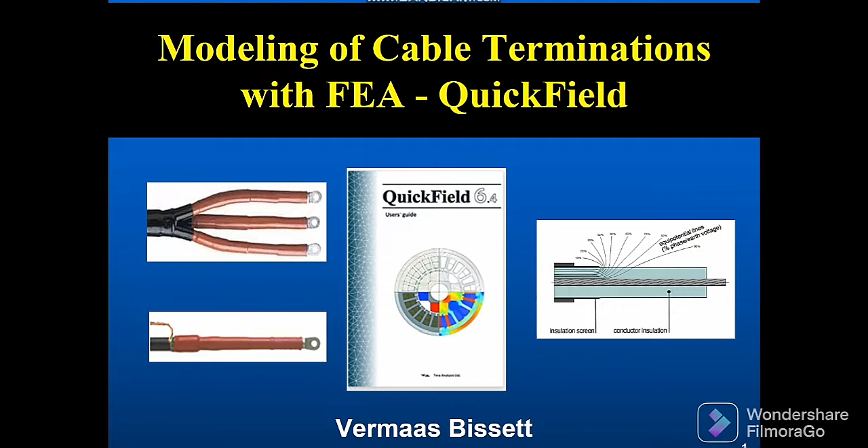The importance and reasons for termination modeling: there are many reasons why this is important. One could summarize as follows. It is a critical component of power systems at all voltage levels. There is currently evidence in the industry of high failure rates, especially at the medium voltage level. It is a specialized and complicated domain. Many defects due to poor workmanship can be simulated by making use of finite element analysis. It will increase our understanding of the behavior and root cause of failures.

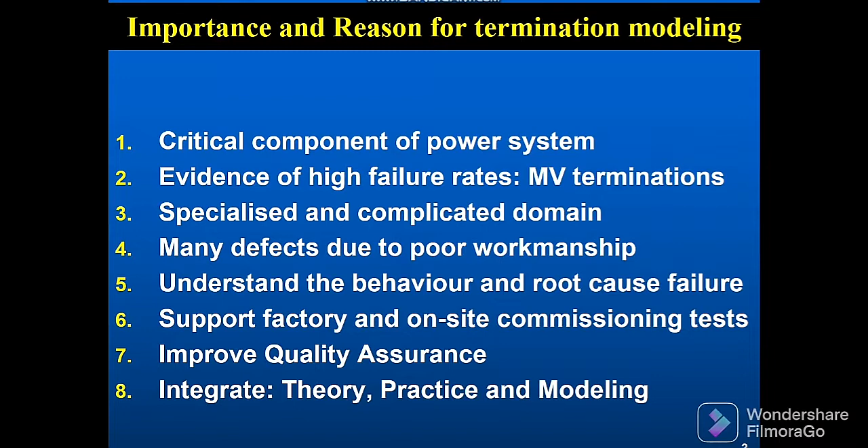It will support factory and on-site commissioning tests. There are many international and national standards that prescribe certain voltage levels for on-site commissioning. By making use of suitable models, one could have a better understanding of the specified voltages required. It will also improve quality assurance, especially if modeling can be incorporated into the training curriculum for cable terminations. And most importantly, it will provide an integrated approach whereby the theory, the practice and the modeling of electrical engineering are combined to add additional value.

Why finite element analysis? The picture below represents the partial discharge models currently available within the industry. On the far left is the capacitor model, or the traditional ABC model, most common for simulating partial discharge within materials. There are also induced charge models and plasma models. But a very attractive method to simulate cable terminations is finite element analysis, especially with its electrostatic capabilities.

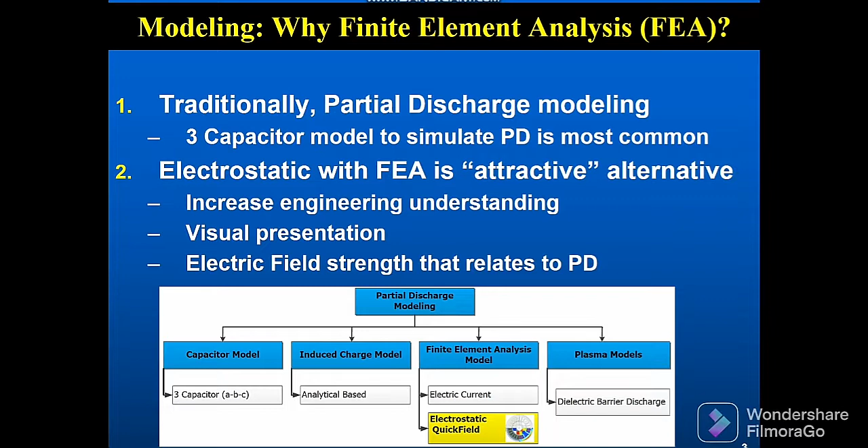Why is it so attractive? It can increase our engineering understanding of this domain. It is excellent for visualizing the model and the component under evaluation, and one can relate the electric field strength to the partial discharge.

Overview of the presentation and demonstration: in this video I will explain and demonstrate with QuickField the critical stress area at the triple point. I will further present three QuickField models. The first will be the termination defect most commonly found in the industry, called the ring cut at the triple point, done with an axisymmetric model.

We will also look at a defect-free termination with all the subcomponents, and then a third model representing the cable as prepared but prior to adding any of the termination components, done as a 3D extrusion model. Lastly, there will be a comparison between the calculated values and the simulated values of electric field strength at the triple point.

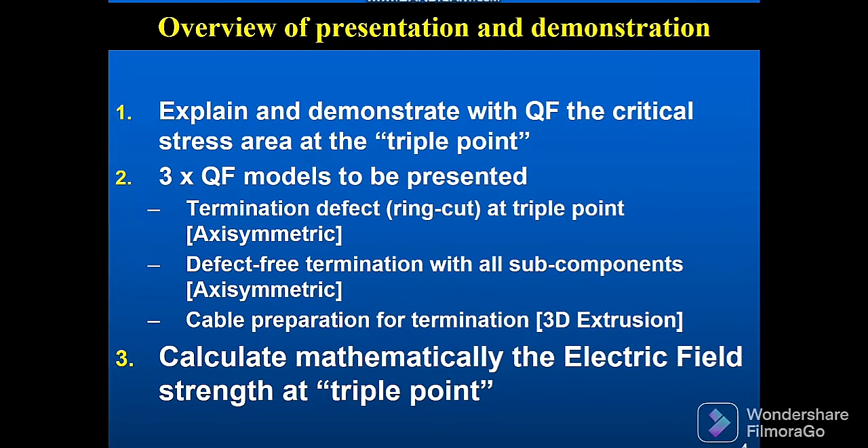If one creates a defect-free model for a cable termination, it is important to follow certain criteria. A precise dimension should be followed at all times when referring to the instruction manual, and the material detail for all subcomponents must be known. It is also important to have a good understanding of all the subcomponents, like the stress relief mastic, stress control tube, and the anti-track tube.

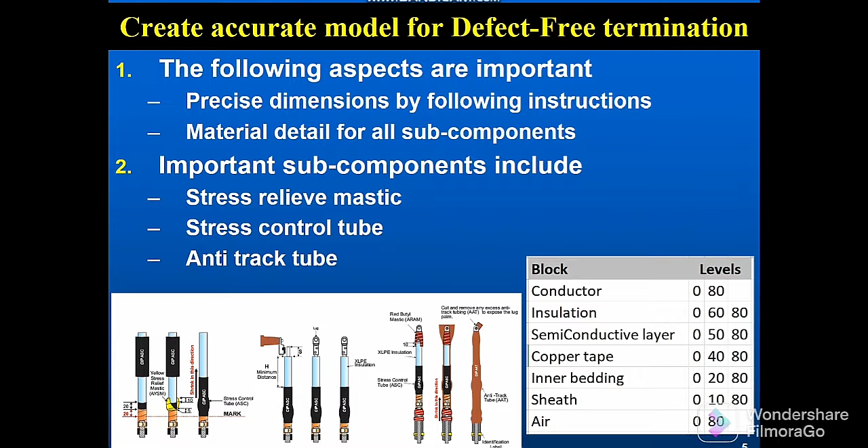Furthermore, when one builds the 3D model, there should be a clear understanding of all the applicable dimensions. When building the ring cut defect and the defect-free termination, one will look at the constructed model within the QuickField program, and I will also refer back to this sketch to make it clear where all the subcomponents of the cable termination are located.

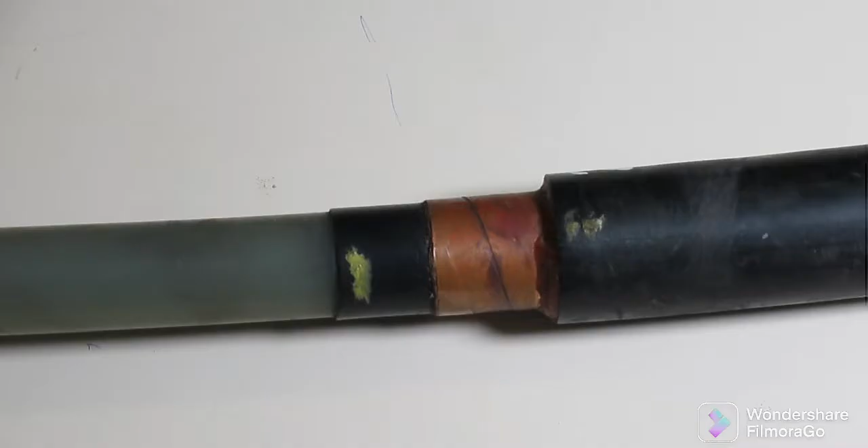In this video, with all the modeling and simulation, a single core XLPE cable will be used. This is the cable that was used, with the given dimensions: the insulation or XLPE, the semiconductive layer, the copper tape, and the sheath. The triple point will be discussed, which is basically the point where the semiconductive layer, the XLPE insulation, and the air come together.

So the triple point is the circumferential area around the cable considered to be the critical point. In order to prepare the cable for the termination, good workmanship is required in this area, as well as the correct tools, and it is important to follow the instruction manual in terms of dimensions.

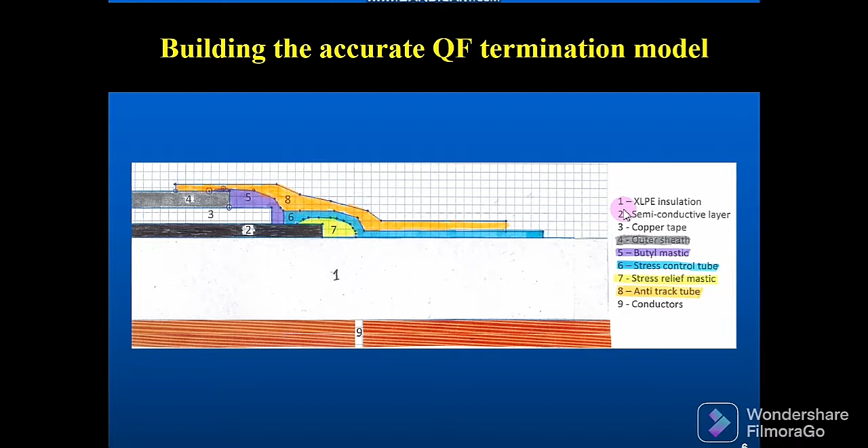The following section of the video will focus on modeling a defect-free cable termination as far as possible. We will construct an 11 kV cable termination using an XLPE cable, using the detail presented earlier and the various components that form the cable termination. This sketch can be used as a reference, indicating the various parts of the cable and the termination.

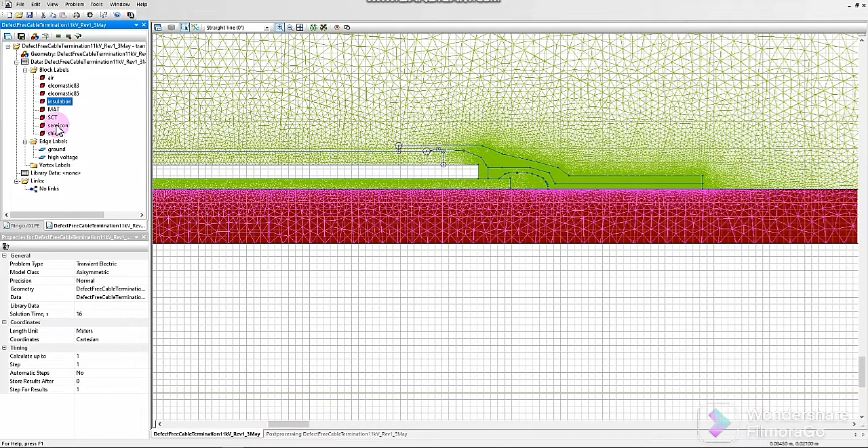For completeness sake, we will quickly indicate where the cable and the cable termination components are. First of all, we will start off with the insulation, then the semiconductive part, as well as the ground part or the copper tape that is part of the cable, as well as the outer sheath or shield.

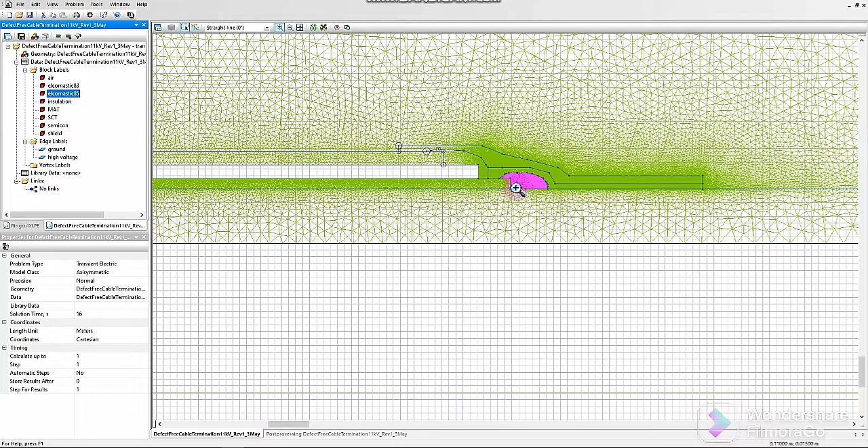Then inside the cable termination, the components that have been used is various mastics. The first one is the one that you will find at the triple point where the semiconductive part, the XLPE insulation and the air comes around. So this mastic is very important.

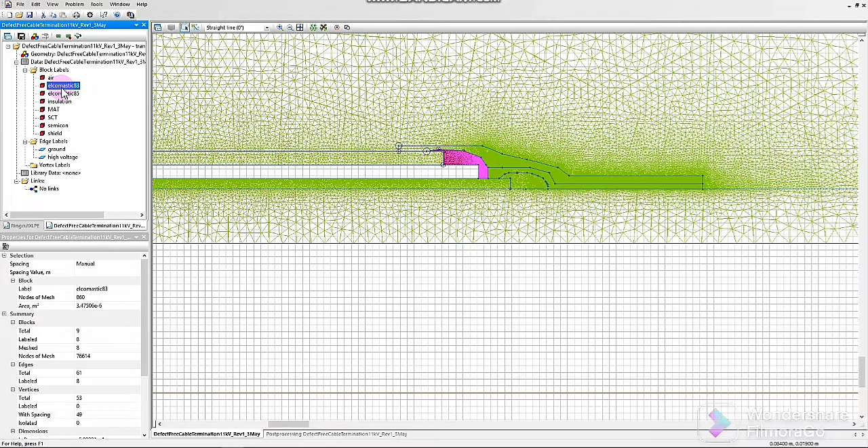Secondly, the stress control tube. Then there is another piece of mastic tape that is applied, and then at the end you will have anti-tracking tube across the entire termination.

This model has been built already and the mesh has been created. The ground voltage is clearly indicated in this area, which is the copper tape.

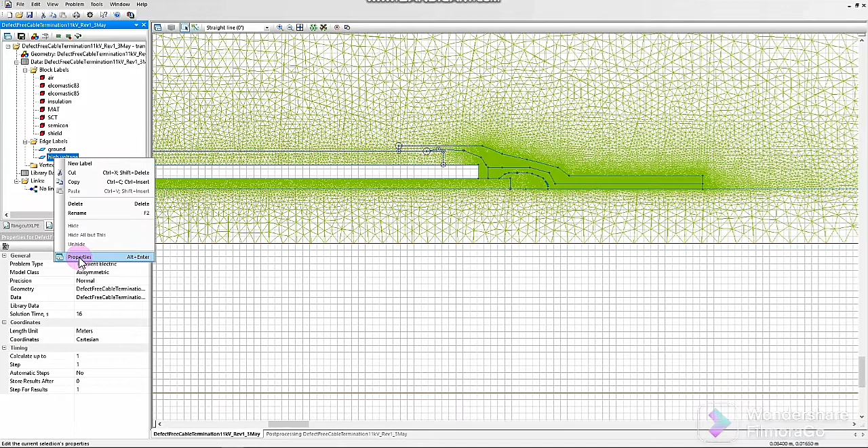The nice thing about modeling the termination is selecting the various voltage levels. So the phase to ground voltage for this termination will be 6,350 volts. So this will be our first simulation, just to see if the model is working.

The important factor to measure is the electric field strength. As you know, air breaks down at around 3 kV per millimeter. So as soon as you reach those levels, it will become critical for the performance of a cable termination.

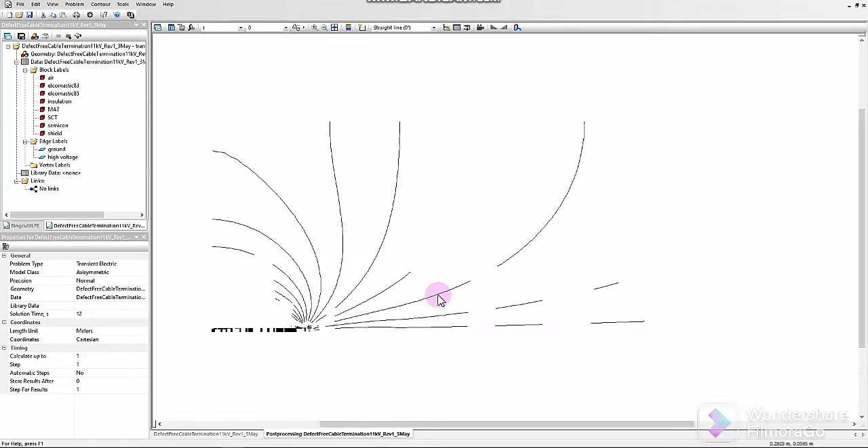One can now zoom in and select the field strength, which will be our primary indicator to monitor during the simulation.

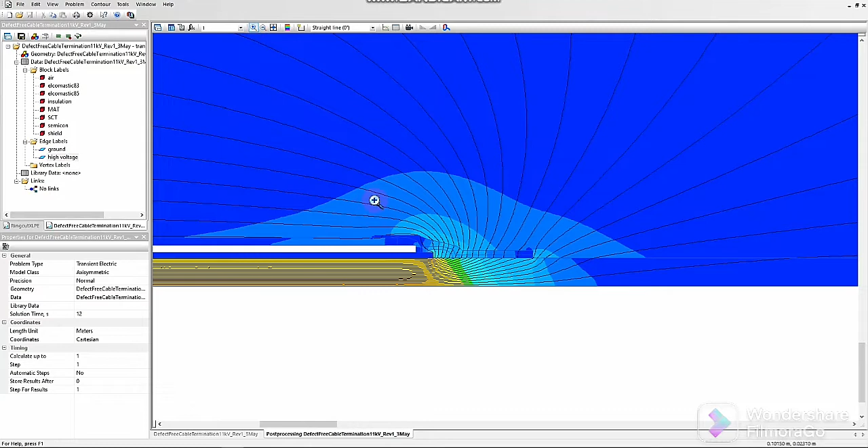If I zoom into the critical area, which is the triple point, the field strength is less than 3. Currently it's standing at 2.53 kV per millimeter, which indicates that the workmanship and the way the termination has been assembled is good. One can now continue to increase the voltage.

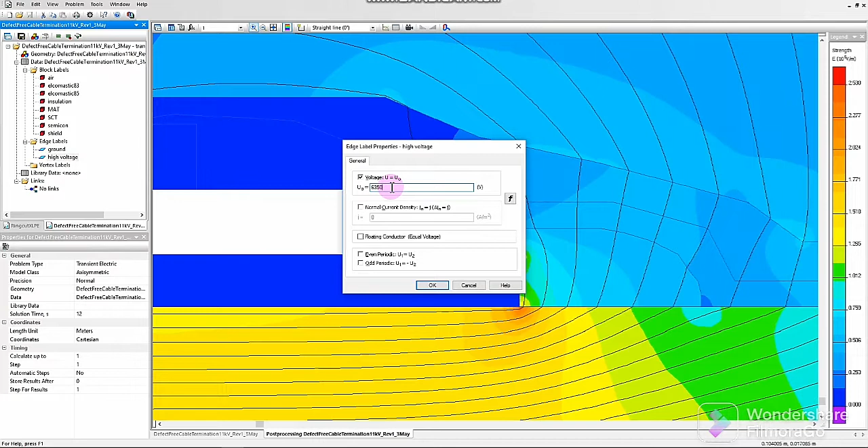The next one will be at 12.7 kV. And this is also the typical values that the test engineer will use when he is commissioning the cable termination.

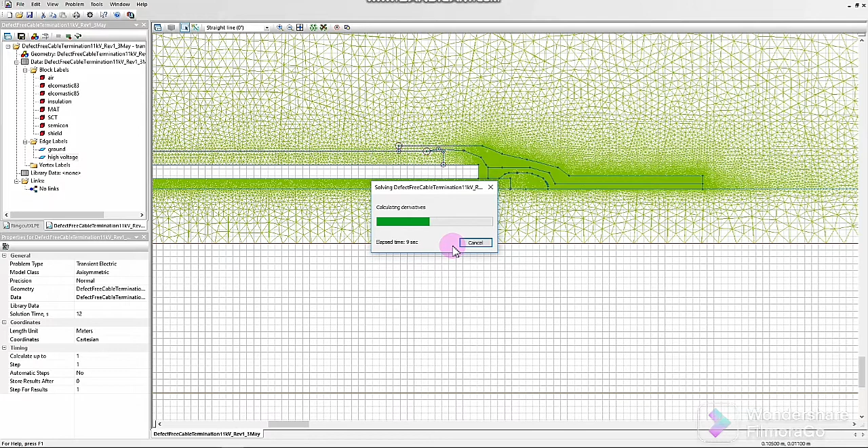Once again, there is a correlation between the applied voltage and electric field strength, but it is important for the density around that area and how that will change with the increase in voltage. Once again, we select the electric field strength. We apply the legend and we zoom into the critical area.

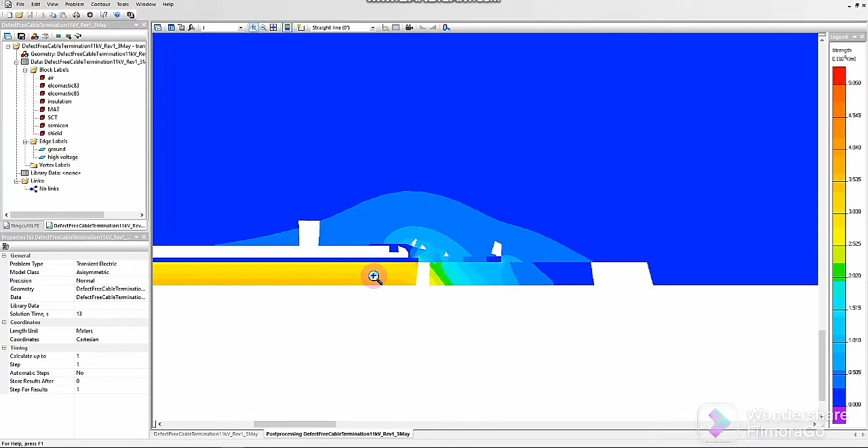So already at twice the rated voltage, one could see that there is an increase in the electric field strength above 5, although it is restricted to a very small area.

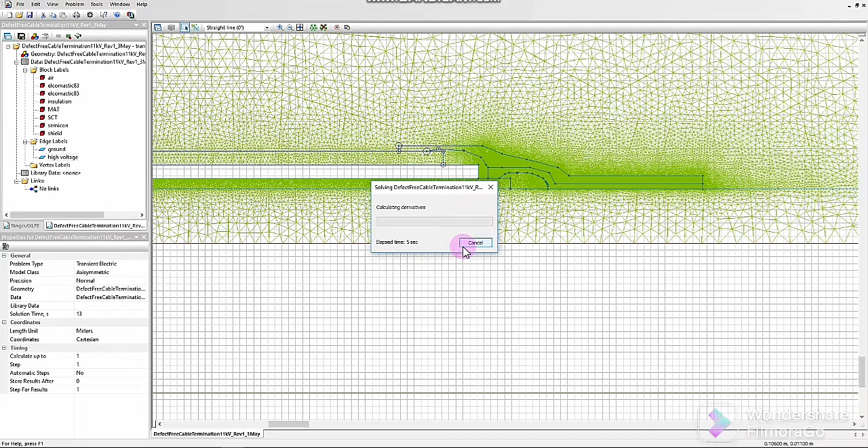The third test point will be at 19 kV. Typically, if one considers international standards, depending on the country and the type of standard, the test voltage can go up to 4 or even 6 times the rated voltage.

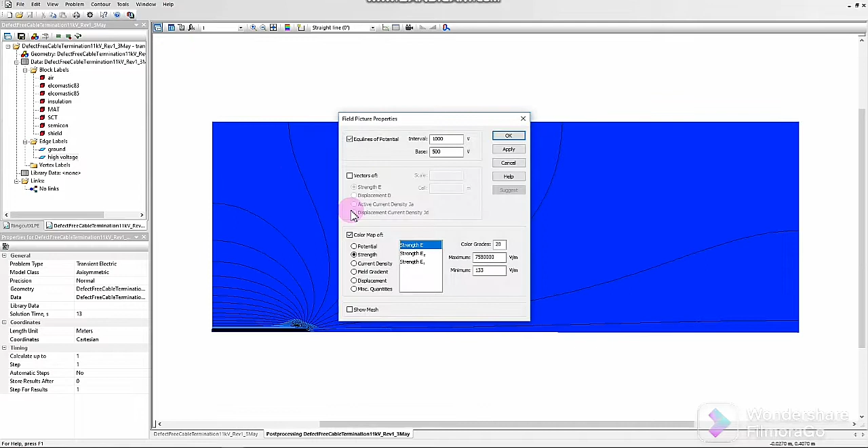So let us look at the field distribution at 3 times the rated voltage. One could see once again it is in the critical area. It is more than 7 kV per millimeter, but it is restricted to a very small area.

So the benefit of modeling cable terminations with finite element analysis is to also prove that the modeling relates to the applied test voltage.

The next section of the video will focus on how we can use QuickField to simulate defects within cable terminations. We will use exactly the same model as the previous section, a typical 11 kV cable, but for this part we will create a defect within the critical area.

This is the triple point as previously explained. So we will create a defect around the ring cut area, which is in the circumferential area around the semiconductive insulation area. We have created an insert of 1 millimeter deep and 1 millimeter wide. So this defect is across the entire cable area. This defect is very common.

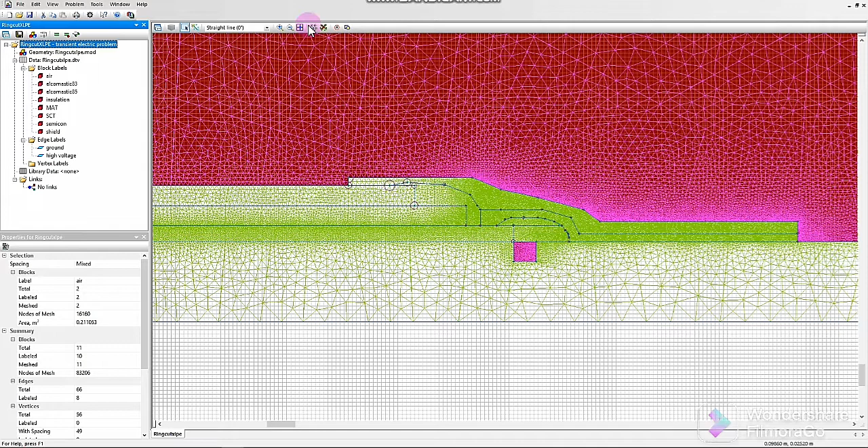Once again, we will create the model. We will apply all the various parameters. We will create the mesh. The ground is still the same. In this instance, we will start off once again with a voltage of 6.35 kV.

We will run the simulation and we will look at the results in the critical area. Once again, we are interested in the electric field strength in that area.

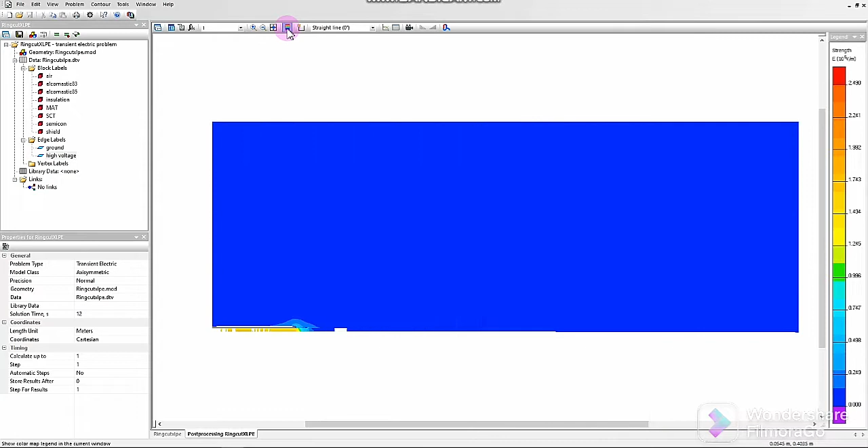So the electric field strength is less than 2.5 kV per millimeter, which is not that high, but it is quite extensive in this area across the entire 1 millimeter deep insert into the XLPE insulation. So with time to come, this void that is created will be across a high stress area, and this will start to deteriorate the insulation due to partial discharge, which is the effect of the electric field strength.

It is due to chemical reaction. It's due to the electrical phenomena in that area. And with time to come, this area will start to grow.

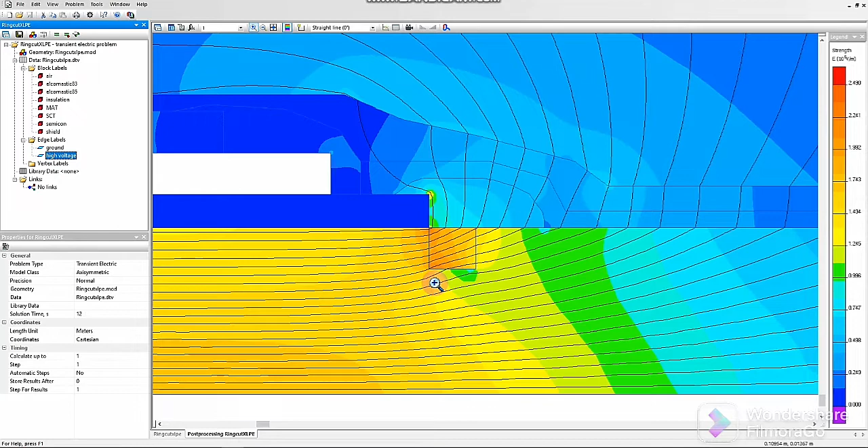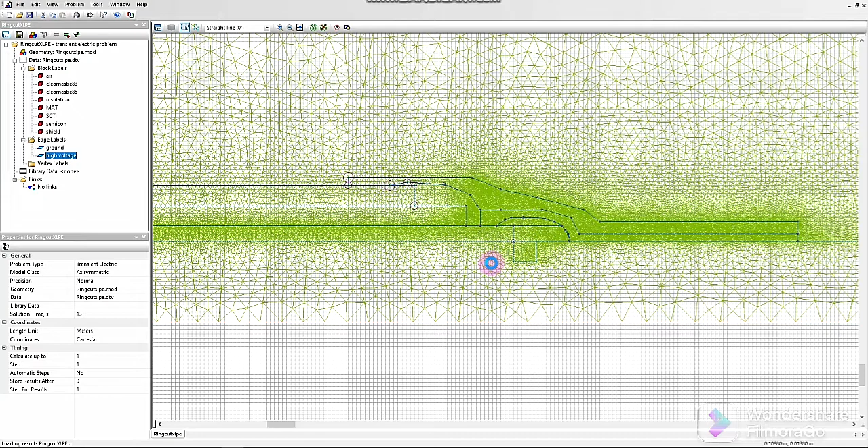The next voltage will be 12.7 kV. Just for comparison purposes, in relation to the previous section, it's focused on a defect-free termination. There is obviously a great correlation between the voltage applied versus the electric field strength, which can be seen in this model as well as in the previous model.

Once again, the electric field strength is far above 3 kV, so breakdown in air will start to occur in this area, and it is quite a significantly large area.

Once again, we will go up to 3 times the rated voltage, which is 19 kV.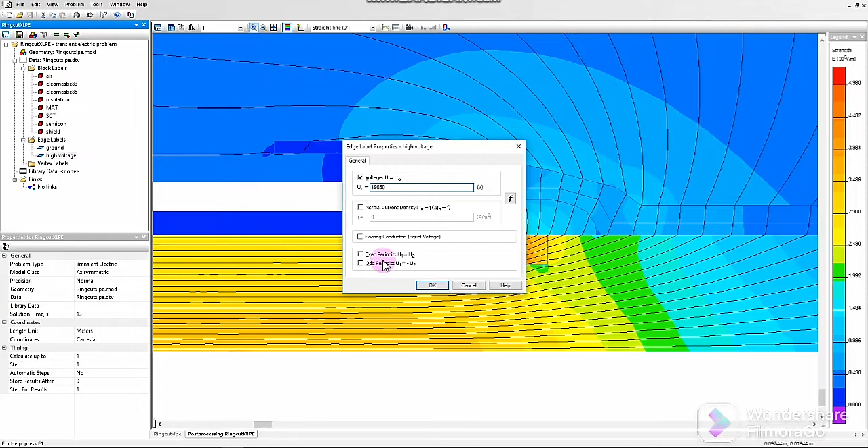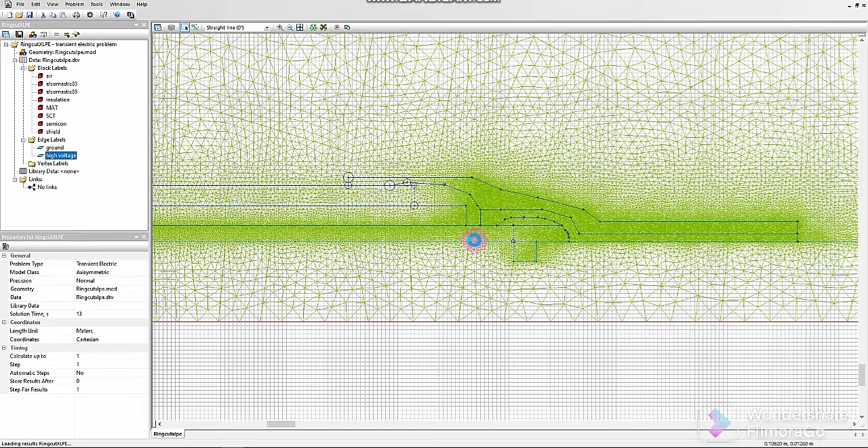So even at the rated voltage of 6.3 kV, the electric field strength is just below the level already enough for discharge to occur. One could see at 3 times the rated voltage, the electric field strength is almost 7.5 kV per millimeter, which is quite significant. Although it is not much higher than the defect-free termination, the area is of importance.

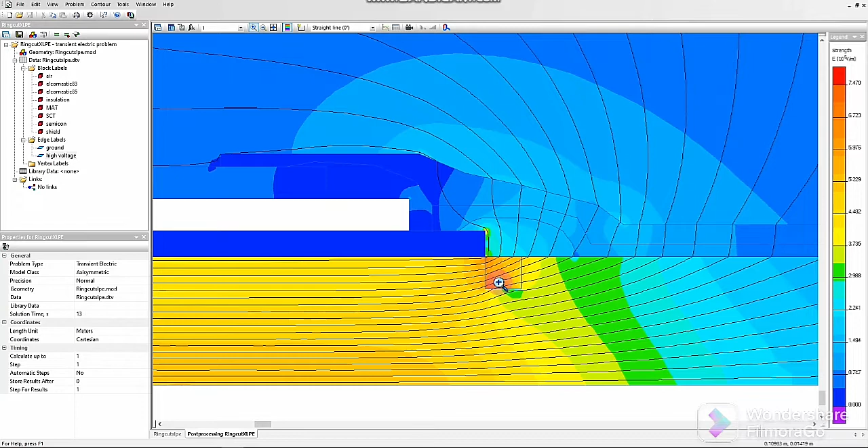The next section of this video will focus on the electric field strength at the end of a cable that was prepared in accordance with the instruction manual, meaning that the semiconductor and all the necessary layers have been prepared and the cable is ready for the termination to be applied.

There are two reasons why we would like to look at the electric field strength in the critical area. We all know from literature and from practical investigations that the semiconductive or triple point area, where the semiconductive layer, the insulation and the air come together, is expected to show high discharge and high electrical strength in those areas. But we would like to visualize it and model the values, and then secondly, we would like to compare the simulated values to the mathematically calculated values.

We will use 4 different voltage set points where we will change the applied voltage.

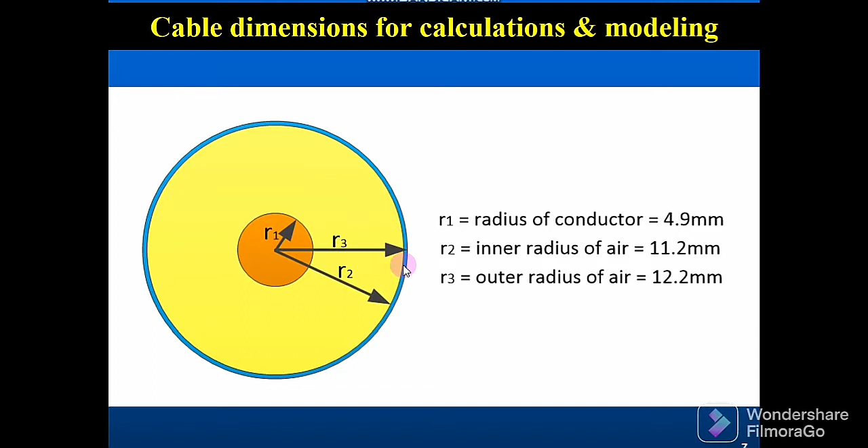It is also possible to calculate the electrical field strength in this vicinity by making use of the following equations, where one can use the following criteria in order to calculate the voltage at the surface, the electric field strength inside the insulation. But in our case we are interested in the electric field strength at the surface 1 millimeter above the insulation. All these details can be found in the book Some Thoughts on MV Cable Accessories.

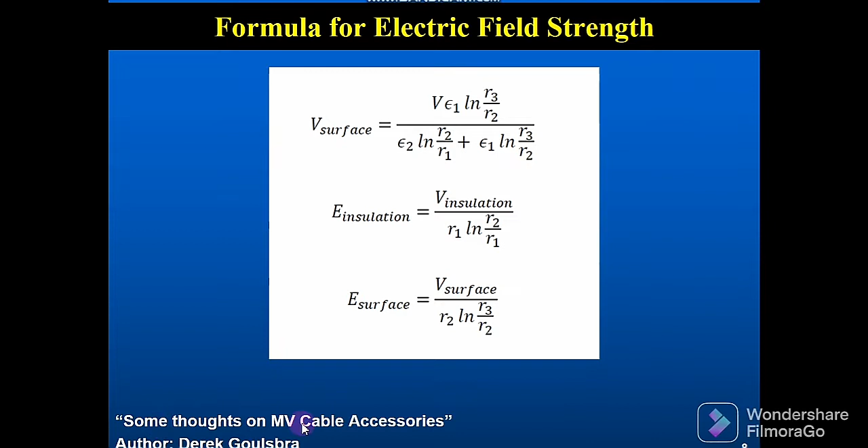Then finally, we will compare the calculated values at the 4 different voltage points. We will calculate the electric field strength and we will compare it to the simulated field strength.

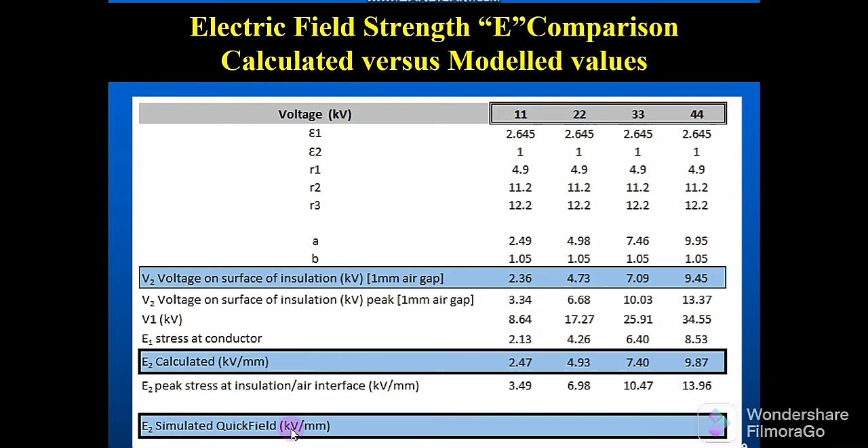This model will be built by making use of the 3D extrusion model class, and like the previous sections, the problem type remains electrostatic.

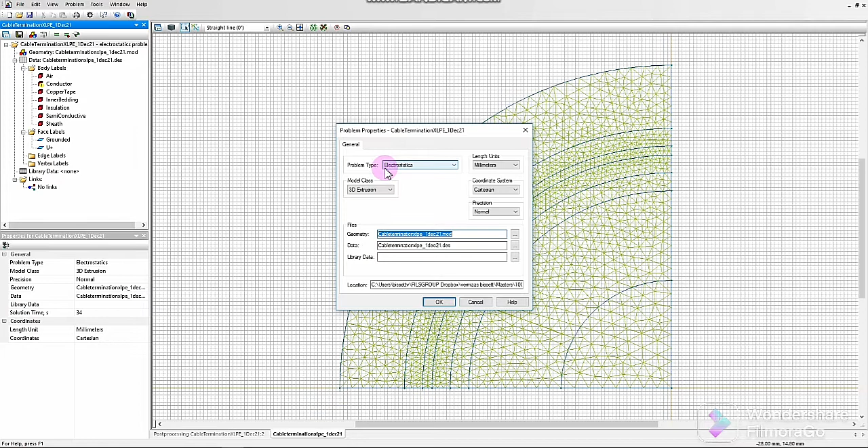Only a quarter of the cable will be built, and this allows for faster simulations and also for easy access to the internal parts of the cable.

As previously, the parts of the cable presented in this model are the conductor, the insulation, the semiconductive layer, the copper tape, the inner bedding, the sheath, and then very important, it is also required to create the air around the cable in order to finalize the mesh created for the model.

Once the model has been built in the 2D view plane, one must now apply the various block labels to create the third dimension.

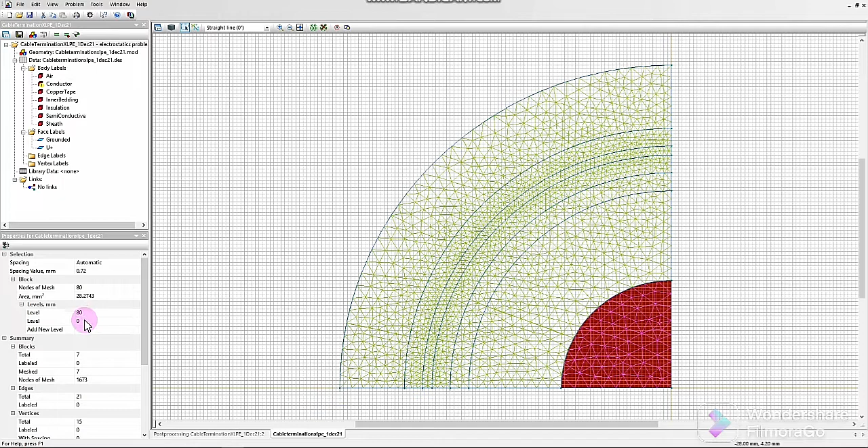The conductor will go from 0 to 80, and you have to insert these levels under the block details. The insulation will be from 0 to 60, and the remaining portion from 60 to 80 is required for the air.

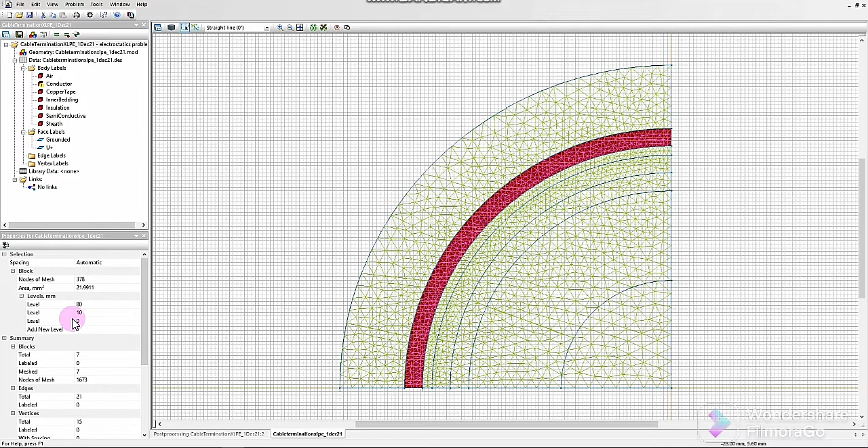Likewise, the semiconductive layer is from 0 to 50, and the air is from 50 to 80. The copper tape, 0 to 40, and 40 to 80 to make provision for the air. The inner bedding, 0 to 20, and 20 to 80. The sheath is 0 to 10 and 10 to 80. The air gap is from 0 to 80.

It should be noted that the dimensions here are not 100% in accordance with the cable termination due to sizing, and for demonstration purposes, as we are only interested in the triple point for viewing.

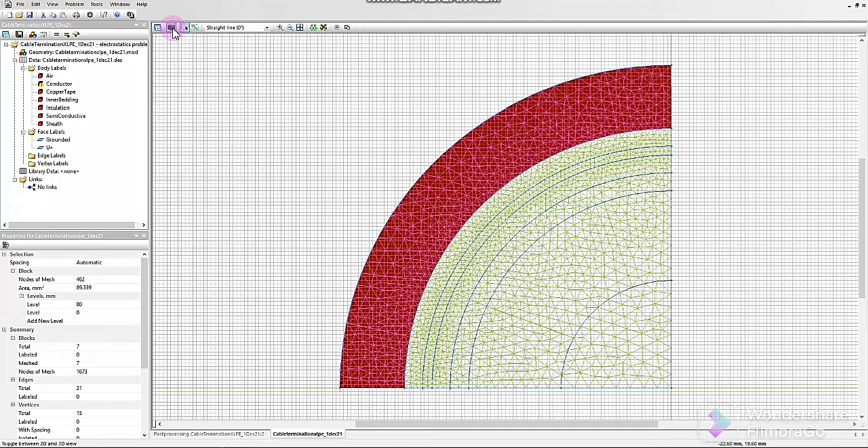Once the various levels have been inserted, you can now go to the 3D model to visualize your cable, and it is best to hide the air so that you can see the cable as prepared in a better way.

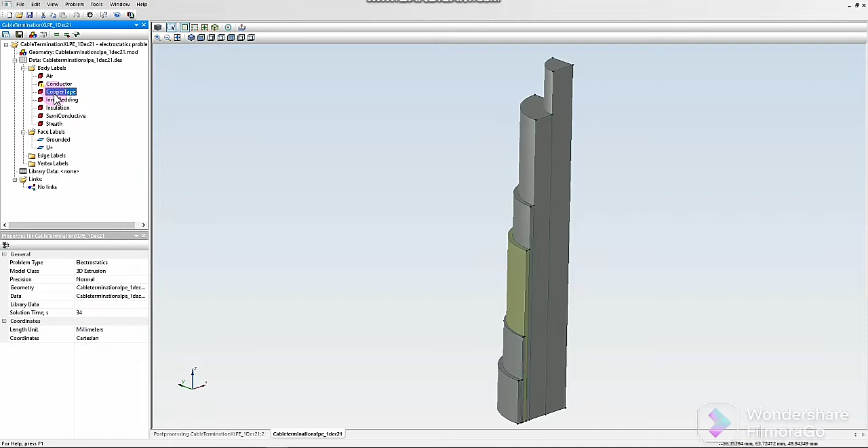So once again, to confirm your model: that is the conductor, that is the insulation, that is the semiconductive part, that is the copper tape, the inner bedding, and then the outer sheath. So the model appears to be correct, and remember to also include the air in order to allow for successful simulation.

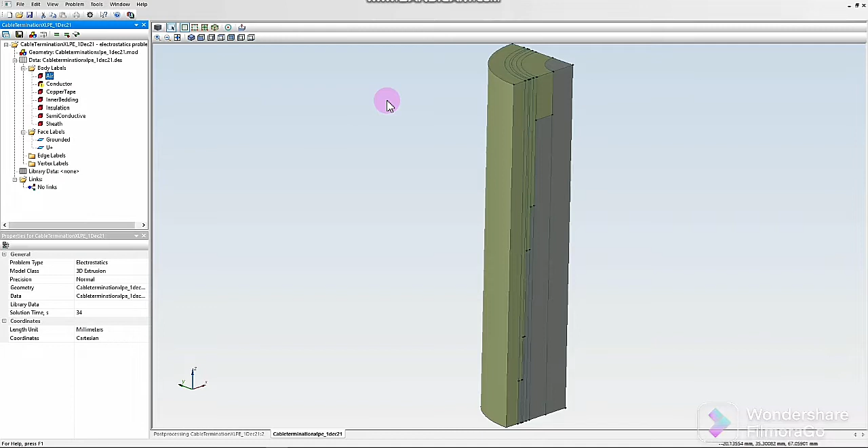For the first simulation point, we will select a voltage of 11 kV. Let us run the simulation.

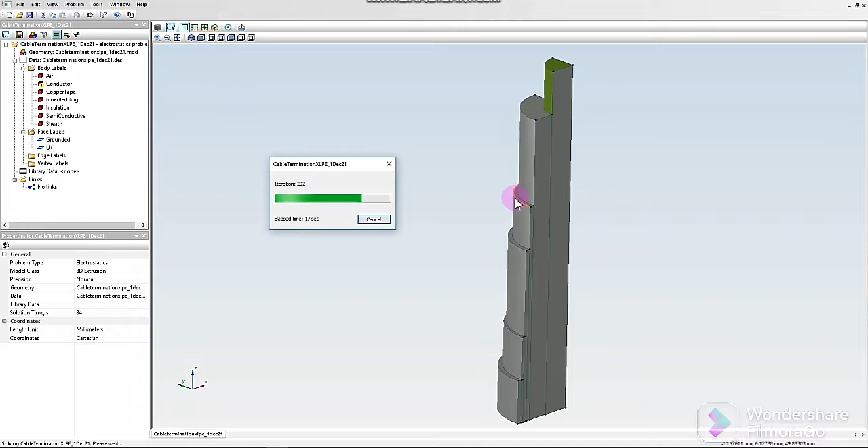So we are interested in the electric field strength in this area, the semiconductive layer and the insulation right here. That is the point of interest.

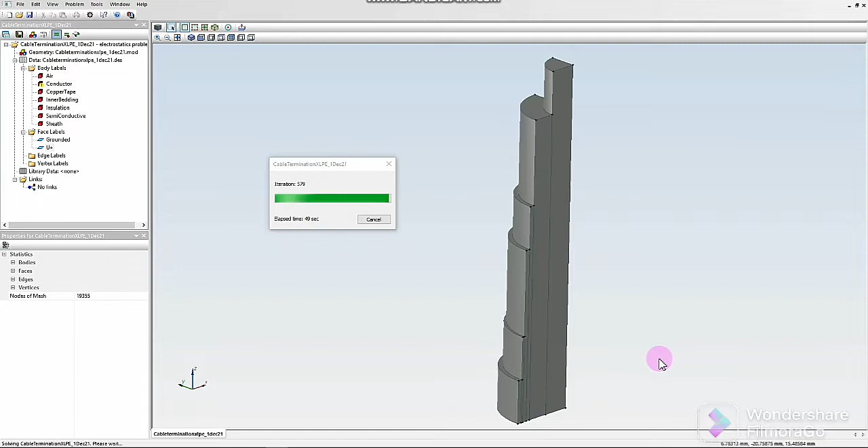For better visualization, let us hide the air. Let us zoom into the point of interest, and let us select the electric field strength. We are interested in the electric field strength in this area. The semiconductive material is about 1 millimeter thick, so in order to look at the values 1 millimeter above the insulation, for consistency's sake I will select the point on this outer peripheral area.

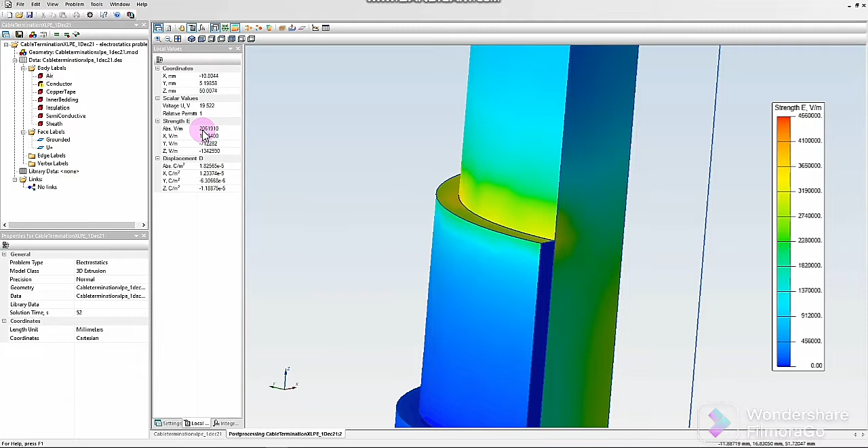So the electric field strength is about 2.06. We can insert that in the simulated values as the first data point under 11 kV. Let us run the second simulation at 22 kV.

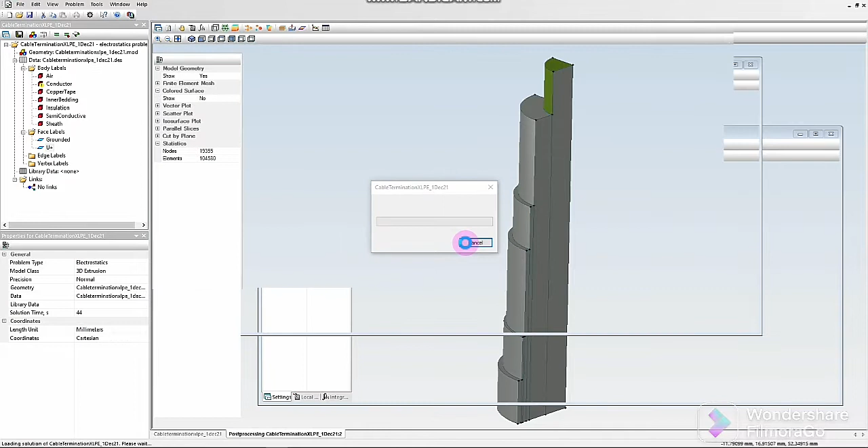Once again, let's zoom into this particular area of interest. We will select E and we will measure the field strength. It appears to be 4.3 kV per millimeter. We can insert that as the second data point.

One can also, for better visualization, select the vector plot, which can clearly indicate that the highest field strength is towards the semiconductive layer, which is about 1 millimeter above the insulation.

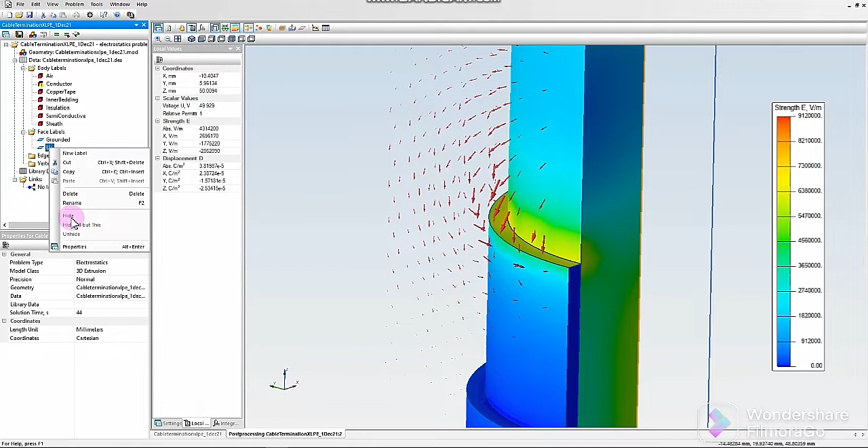Let us simulate the third data point, which is 33 kV. Let us run the simulation. It is also important to note that the simulated voltage selection of 11, 22, 33 and 44 is typically in accordance with test standards for cable commissioning.

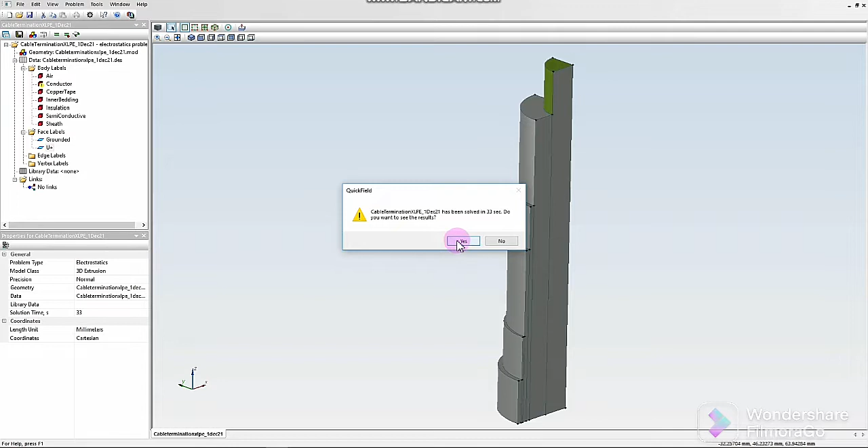This is now the third data point at 33 kV. Although one expects an increase in electric strength in proportion to the selected voltage, it is best to also simulate it.

The value is about 6.5 kV per millimeter.

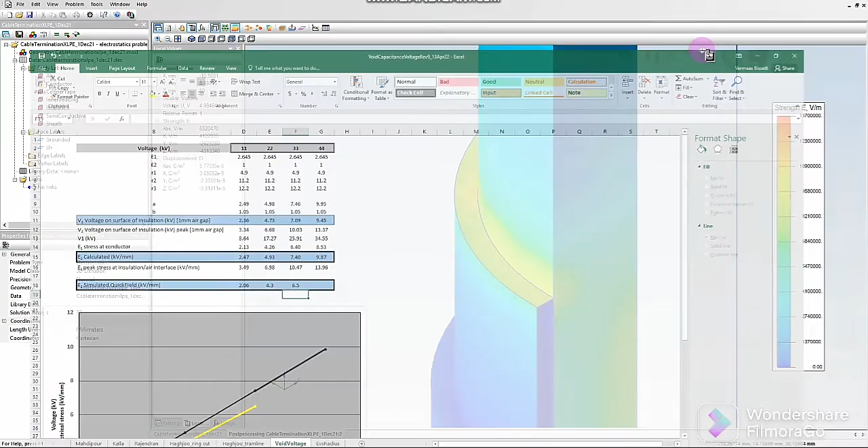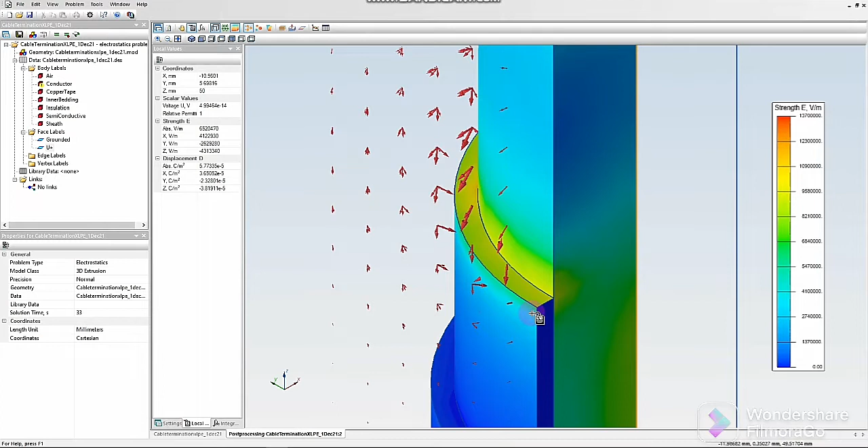And the fourth and last data point will be at 44 kV. Once again, for interest's sake, you can select the vector plot, which clearly indicates by means of the arrow that the electric field strength is strongest in this area. So let us simulate the fourth point.

The value appears to be 8.6 kV. So this was the simulation or modeling of 4 different data points to obtain simulated values for the electric field strength in this area.

Let us see how the calculated and simulated values compare. As previously presented, by making use of the equations, one can calculate the electric field strength at the various radii, and we are interested in the field strength values at 1 millimeter above or outside the insulation. The 4 values as calculated are 2.47, 4.93, 7.4 and 9.87. It compares with the simulated values of 2.06, 4.3, 6.5 and 8.6.

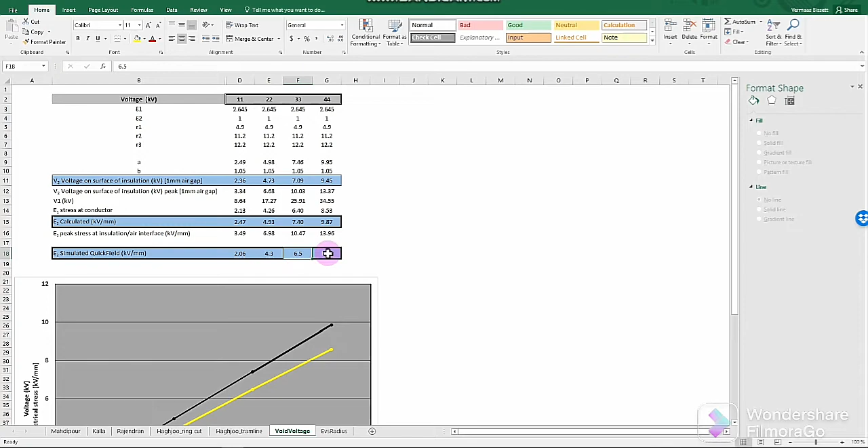So although the modeled or simulated values are slightly below the calculated values, there is great correlation. Both follow, as expected, a linear increase in the electric stress at the 4 different voltage test points. So this proves, from a theory perspective and from a simulated perspective, that the triple point is indeed the area which is exposed to the highest electrical stress.

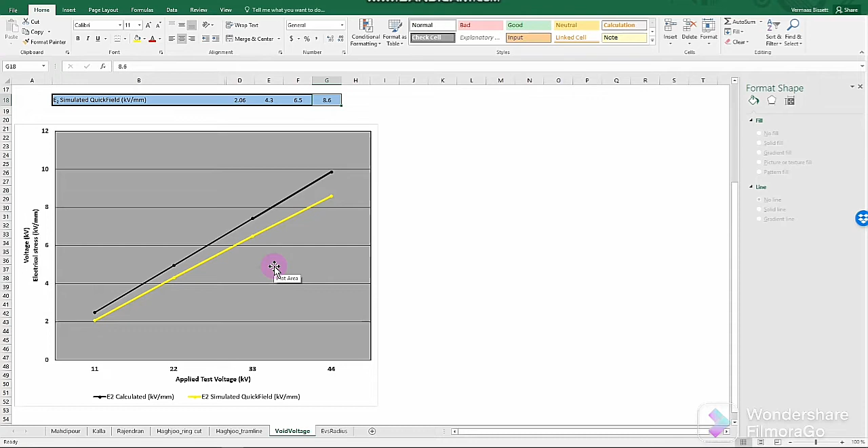Some final observations. QuickField was successfully used to model and build cable terminations, both in the axisymmetric plane and also in the 3D extrusion plane. The second one: evaluate electrical field strength in relation to variations and applied voltages. Variations means the way that the model is constructed using the various components of the cable termination, and the applied voltage is the rated voltage up to 4 times the rated voltage.

QuickField was also used to model defects within cable terminations and also to model the prepared cable end before the termination components were applied. It was confirmed that the high stress area in the termination is indeed the triple point. Number 5, importance of dimensions and material details. When constructing the defect-free termination, it is absolutely critical to follow the dimensions precisely and also to obtain all the material details, especially the permittivity of the components.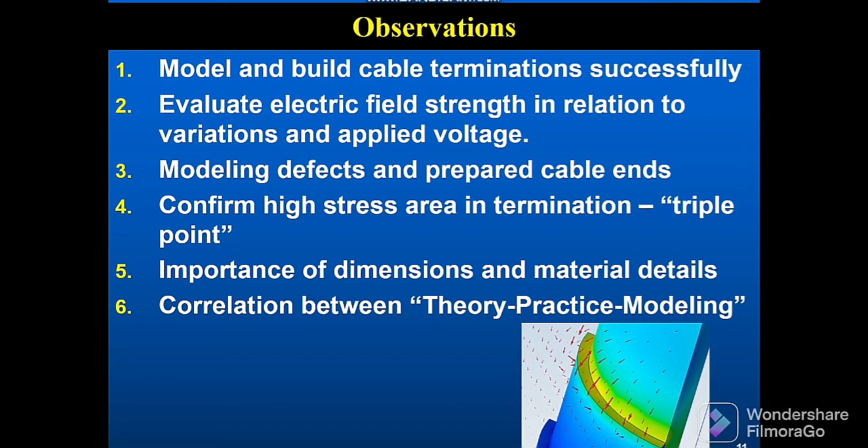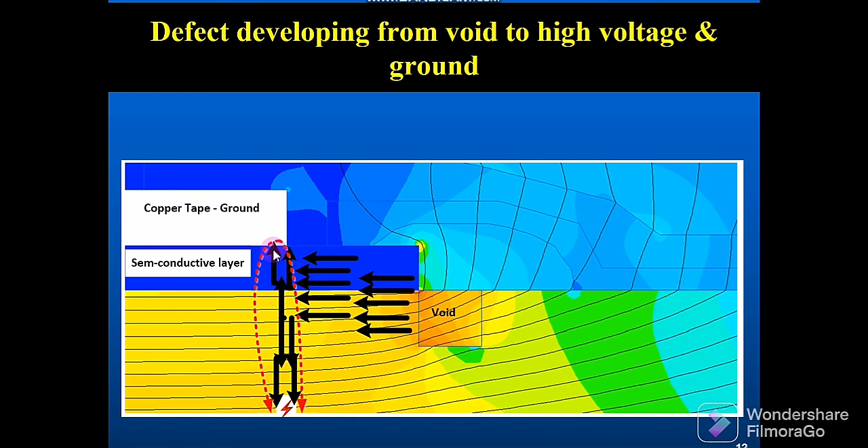There is indeed a good correlation between the theory, the practice, and the modeling. If one goes back to the defect that was simulated, the 1 by 1 millimeter defect with high electrical stress in this area, over many years, depending on the magnitude of the error, the partial discharge will start to deteriorate the insulation and the semiconductive layer, and it will move in this direction to eventually cause a flashover between the ground or the copper tape and the conductor. So the fault in most cases happens in this area.

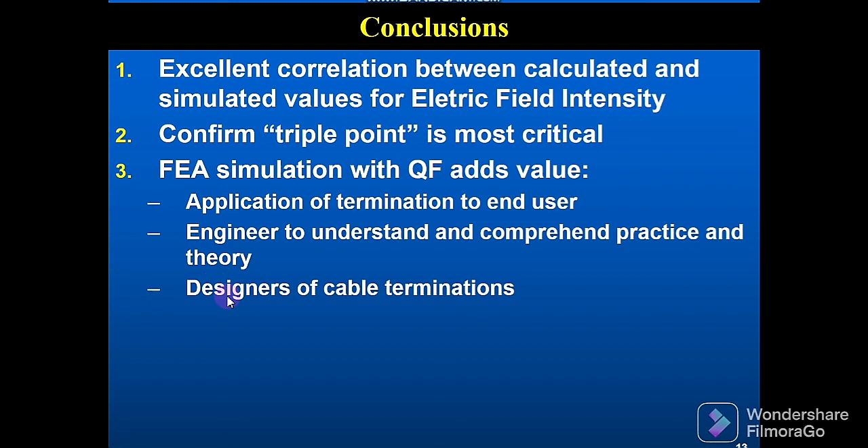Some conclusions. Excellent correlation was found between the calculated and simulated values for the electric field intensity. It was visually shown and calculated and modeled that the triple point is the most critical area. And the finite element analysis simulation with QuickField adds value in the following areas: the application of termination to the end user, the engineer to understand and comprehend the practice and the theory, and QuickField can also add value for designers of cable terminations.